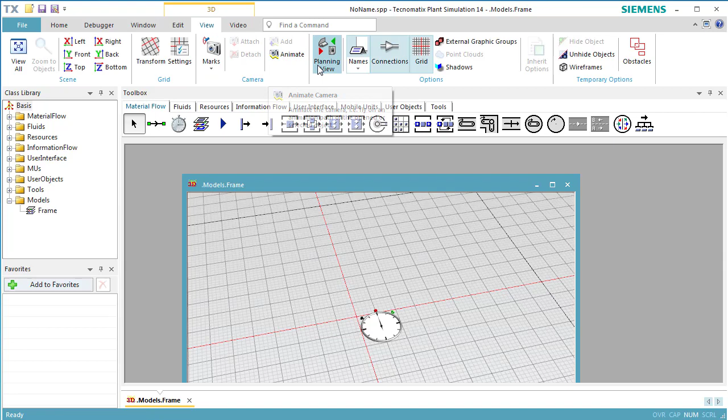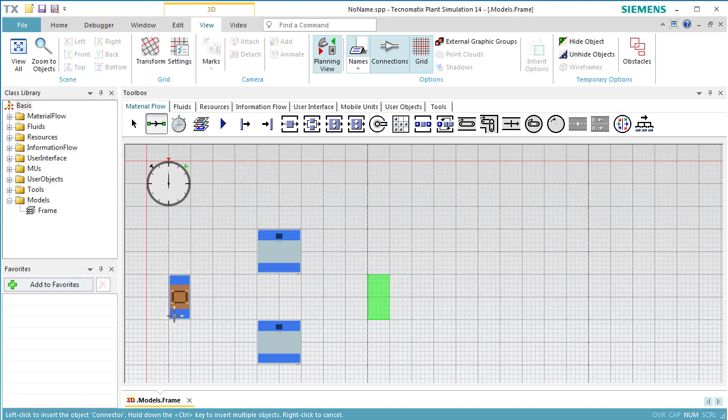To do so, we create a model with a source, two stations representing the main machine and the auxiliary machine, and a drain. The main machine should be the first successor of the source. First, we connect the source and the main machine, and then the source and the auxiliary machine. You can insert the two connections from the two machines to the drain in any order you like.

Then, we open the source to configure it. We want it to produce one part every minute. We click the tab Exit of the source and select the Exit strategy Start at Successor 1.

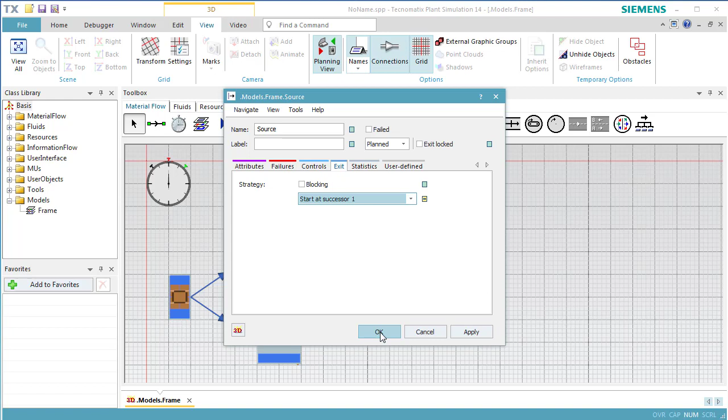We want to simulate interruptions of the main machine caused by failures. To do so, we add a new failure profile by clicking New on the tab Failures. We accept the default availability of 95% and the MTTR of 1 minute. MTTR stands for Mean Time to Repair.

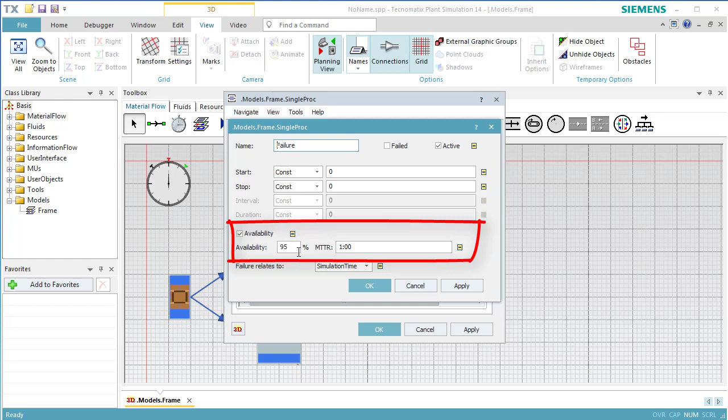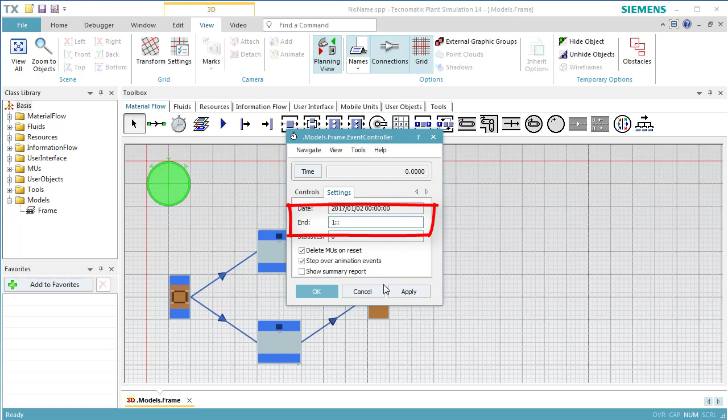As we want to run experiments with the Experiment Manager, we need the simulation to end after a certain time. To enter it, open the dialog of the Event Controller. Check the tab Settings and type a termination time of 1 hour, 1:: in the text box End of the Event Controller. Plant Simulation will automatically expand the time to 1 hour. Click OK to close the dialog. This model is suitable for the intended experiment study.

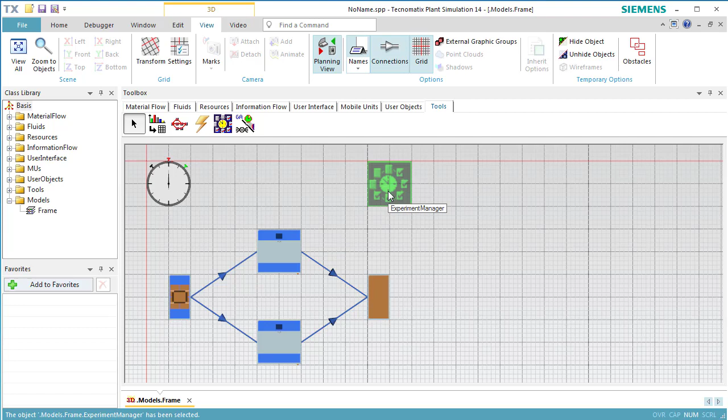Finally, we add the Experiment Manager to our simulation model. You will find the Experiment Manager on the tab Tools in the toolbox. Open it and configure the experiment. We first specify the output values as the target of the simulation study. To do so, we click Define Output Values on the tab Definition.

Drag the auxiliary machine to the first row of the table and drop it there. Then, we extend the name with the statistic value we are interested in, stat working portion, in our case. It's helpful to enter a description of the value, for instance, utilization of auxiliary machine. We then click Apply to run a plausibility check. It tests whether the entered value exists and is suitable for a statistical evaluation.

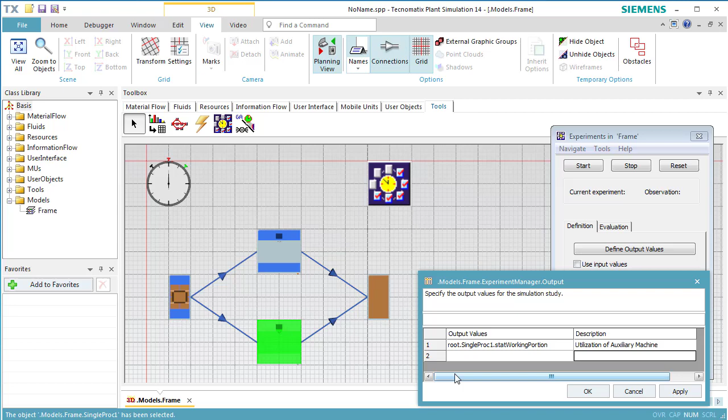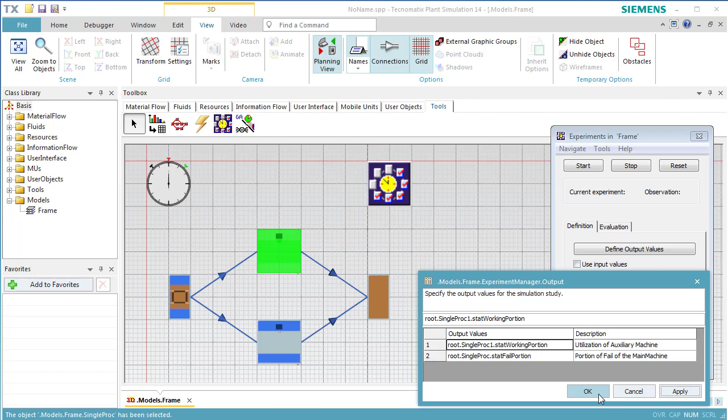To enter a further output value, we click into the table Output and press Enter. We click the main machine and drag it to the second row of the open table. We then place the cursor behind Main Machine, type in a period, and the name of the statistics value that interests us, stat fail portion in our case. It's helpful to enter a description of the value. We entered the description, portion of fail time of the main machine. We then click Apply to run a plausibility check and click OK to close the table.

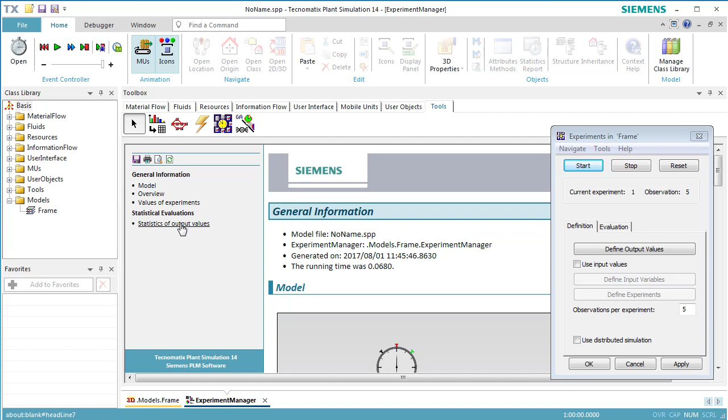Next, we reset and start the experiment run. The Experiment Manager executes 5 simulation runs with different random behaviors caused by the failure we entered. After the experiments are finished, an HTML report will open. Click the page Statistics of Output Values.

The box plot under Evaluations of the Output Value, Utilization of the Auxiliary Machine, visualizes the observed values of the first output value. The box plot visualizes the fluctuations. Minimum and maximum are often considered for a simple evaluation and give an intuitive representation of the variance.

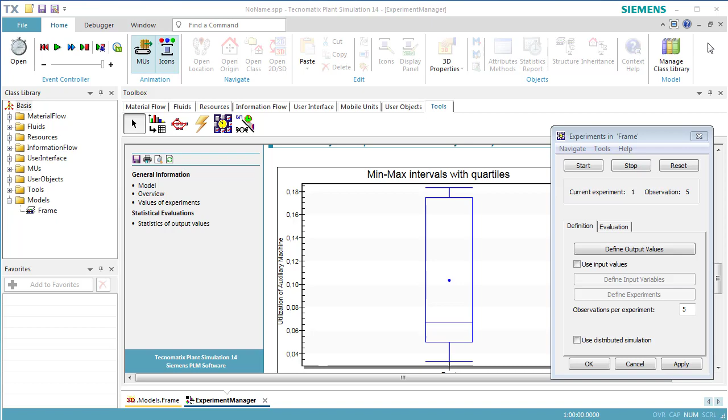A more detailed evaluation is available on tab Evaluation of the Experiment Manager. Click the button Detailed Results to open a table of the numerical results. Typical statistic values of the observed output values, like the mean value and the standard deviation, are shown in numeric form.

The exactness of the mean value is described by the confidence interval. Be aware that one cannot draw conclusions with absolute safety. One can only make statements about a stochastic model with a given confidence level. The confidence level tells us with which probability the true mean value of a measure is located within the confidence interval. The default value of the confidence level of the Experiment Manager is 95%.

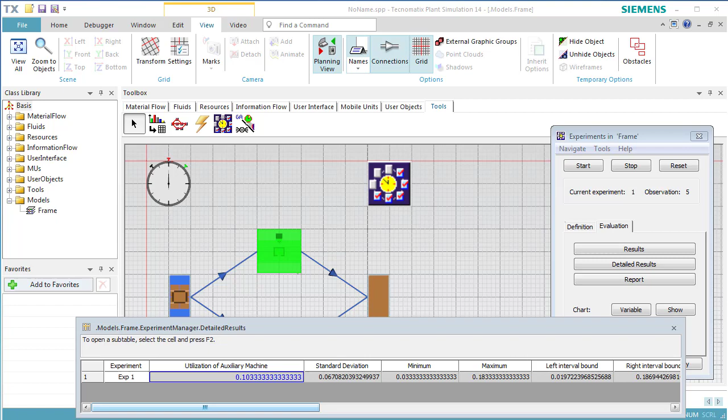After using the Experiment Manager for a statistical analysis, we want to check out how the availability of the machine influences the utilization of the auxiliary machine. We'll change the availability of the main machine. To do so, we define the input value. We select the checkbox Use Input Values and click

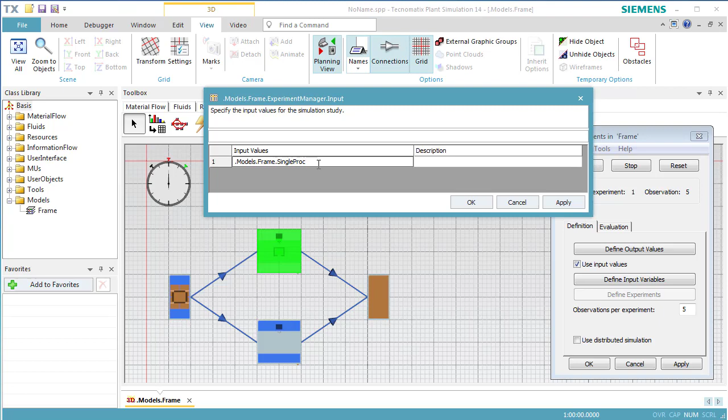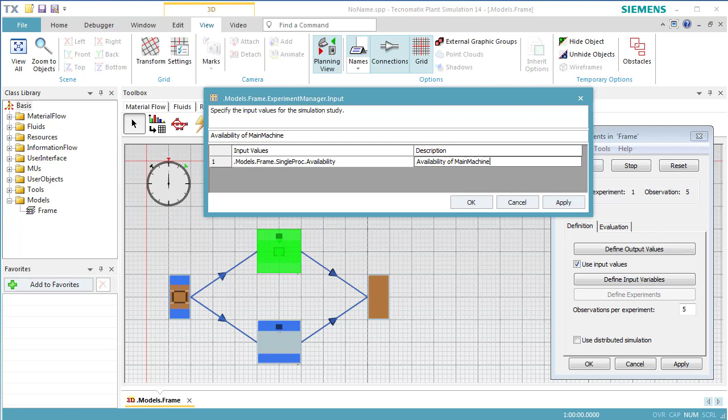Define Input Variables. To enter an input value, we drag the main machine to the first line of the table Input and enter a period, followed by Availability. This activates the button Define Experiments. We click the button Define Experiments.

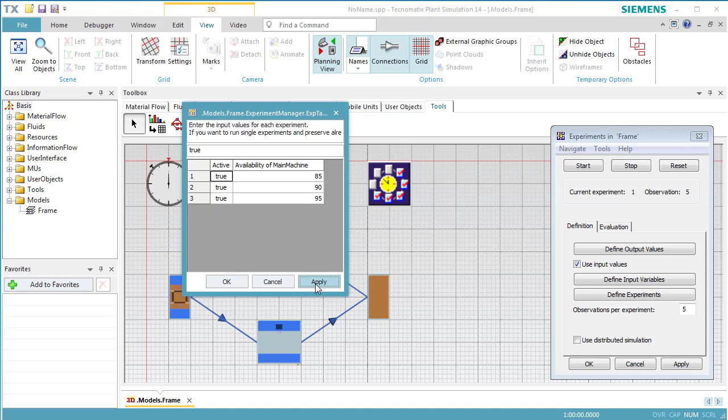In the table ExpTable, which opens, we enter the values 85, 90, and 95 for the percentages of the availability, each in a line of its own in the column. We then click Apply. The first column will be filled with value true, denoting that this parameter will be used for an experiment. Click OK.

This configures a new experiment study consisting of 3 experiments. Each experiment has 5 simulation runs, or observations. Now we're ready to execute our second experiment study to check out how the changed availability affects the results of the simulation study. Click the buttons Reset and Start.

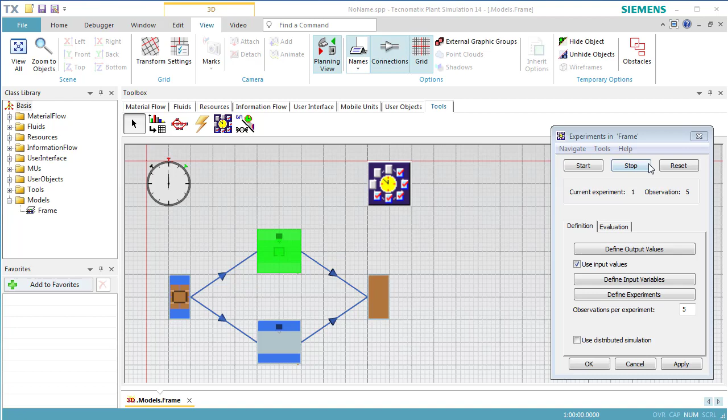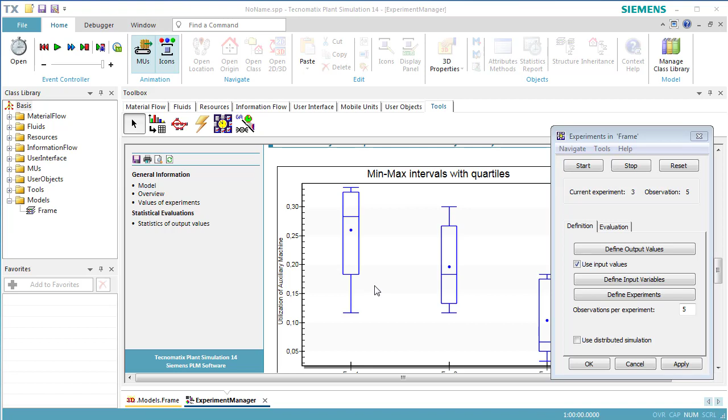The HTML report opens after the experiments are finished. Change to the page Statistics of Output Values. We can view the results of the 3 experiments in one chart on the tab Evaluation. On the tab Evaluation of the Experiment Manager, we can choose to show min-max intervals or confidence intervals.

The chart shows the number of the individual experiments on the x-axis and the observed values of the output values on the y-axis. It shows the expected relationship between the availability of the main machine and the working portion of the auxiliary machine. We see that increasing availability of the main machine results in a reduced working portion on the auxiliary machine.

Click the tab Evaluation of the Experiment Manager. Select Confidence. Comparing the confidence intervals shows that this effect is not statistically significant. In other words, the observed differences can be a result of the random behavior of the model. Further studies are needed. You can close the chart.

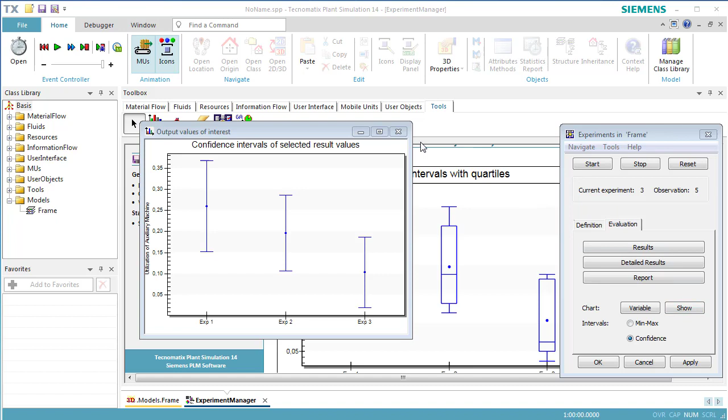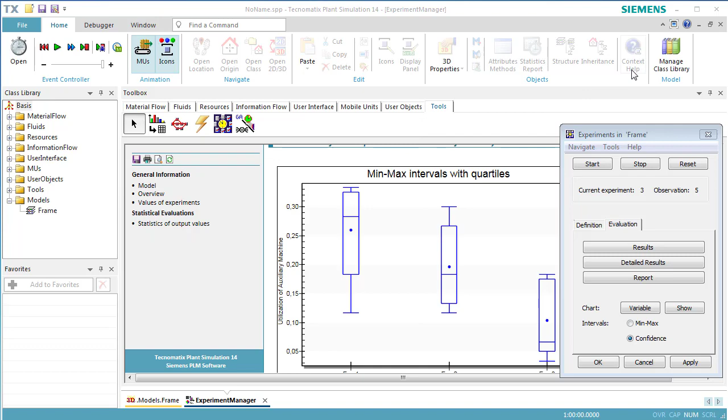To get results with a greater reliability, we must perform more observations per experiment. We change to the tab Definition and type in 50 observations per experiment. After the study, we check the width of the confidence intervals. Click Reset and Start to run the experiments.

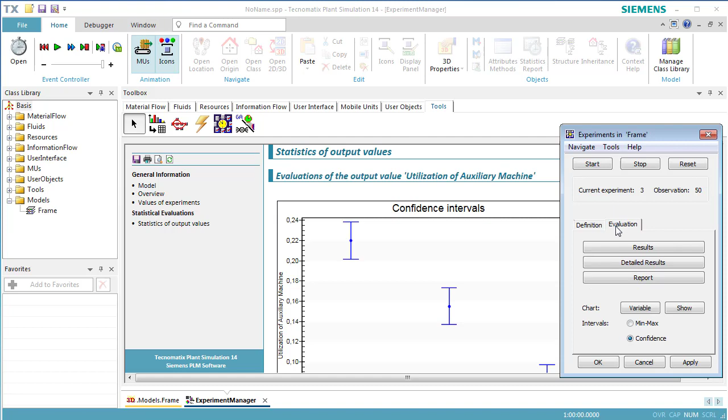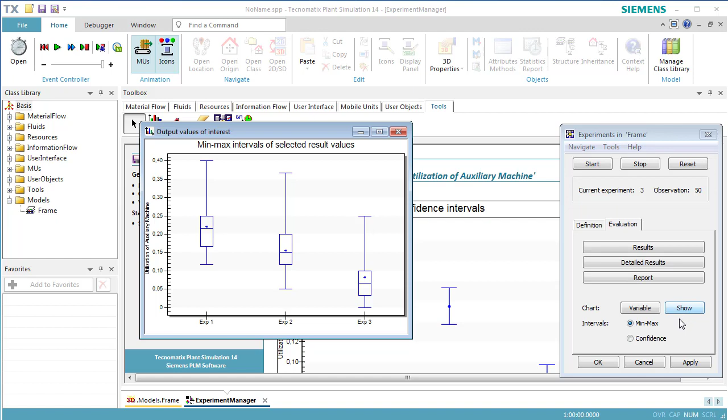After the experiment run is finished, we select the tab Evaluation. Select Min, Max and click Show to open the chart. More observations obviously led to greater min-max intervals. We select Confidence and open the chart again. As is well known, more observations led to a reduction of the width of the confidence intervals.

We compare the confidence intervals and recognize a significant difference. In our study, these observed differences cannot be a result of the random behavior of the main machine. The differences are significant and based on characteristic properties of the model. If you have doubts, repeat the study with 500 observations. This concludes the video using the Experiment Manager.